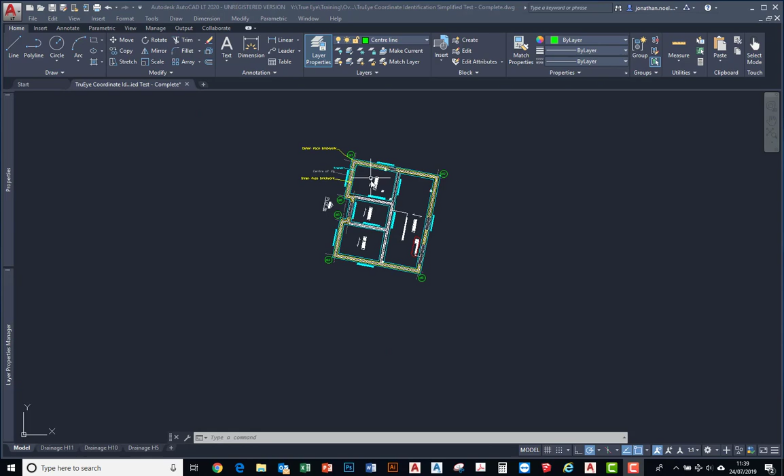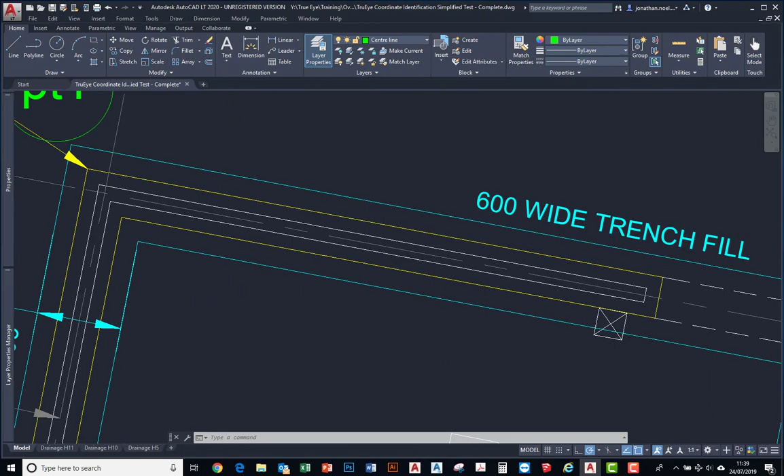The first thing we need to do is show you quickly how to move around AutoCAD. I'm hoping you have a mouse with a scroll wheel, because that makes things much easier. With the scroll wheel, you can zoom in and out by scrolling, and if you position your cursor over where you want to see and scroll, it will take you to that place. So I'm zooming in on point 6, zoom in on point 3, and then zoom out again. The other thing you can do is hold the scroll wheel down to pan around the drawing, which is useful so you can see where you're going at a decent scale. You can zoom out, zoom in again, and pan around. That's the easiest way to get around AutoCAD.

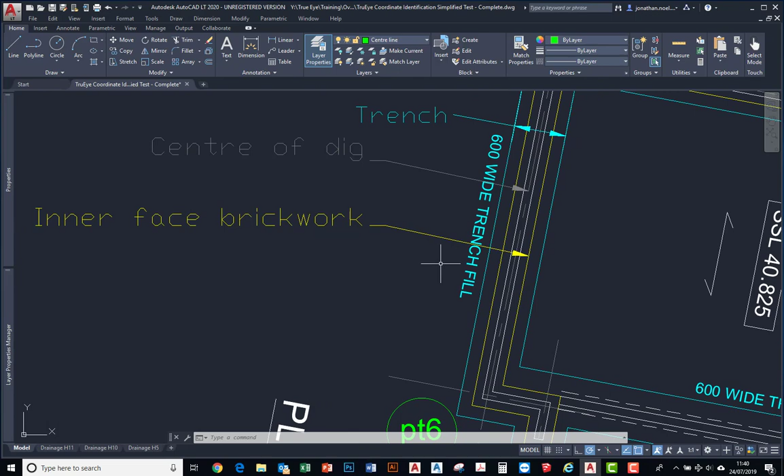Without further ado, what we're going to do in this session is create a centerline. I've already got the layer up here, hovering over at the moment, and that's a layer with a green line type. We have a trench here, which is the yellow box, that extends all around the drawing. The blue box is the actual full trench, and the yellow box is the inner and outer face brickwork you can see. Within that we have a centerline, which I've got in grey here, and that is actually the centerline of our dig.

Some drawings don't have this centerline, so you literally only have perhaps the blue line or the yellow line. So what we need to do is actually create the centerline, which is going to be the midpoint between the blue lines and also the yellow lines.

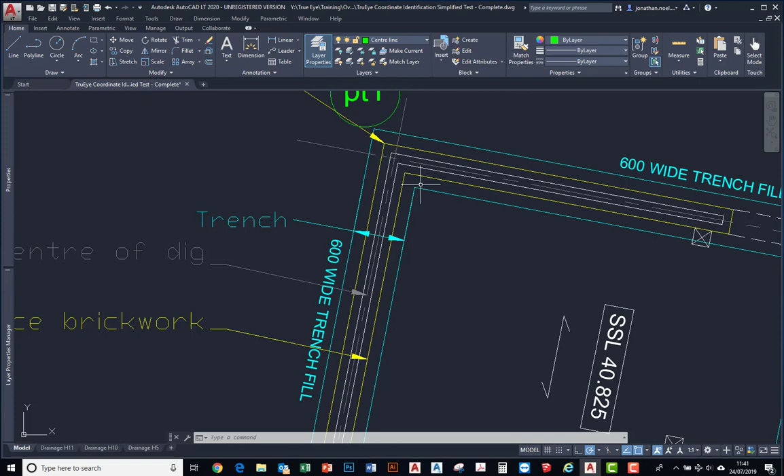What's useful about this drawing is that it shows us the actual trench is 600 millimeters wide, so 0.6 of a meter. We can create a line from the corner of here to the perpendicular of this line, or we can copy a line. Say I could copy this grey line from the end point of the line and move it across to the end point of, or the corner of this, and then trim the line out.

There's a whole load of other ways of doing it. You can offset - type O for offset and offset this blue line by 300. So there's a whole load of ways and methods.

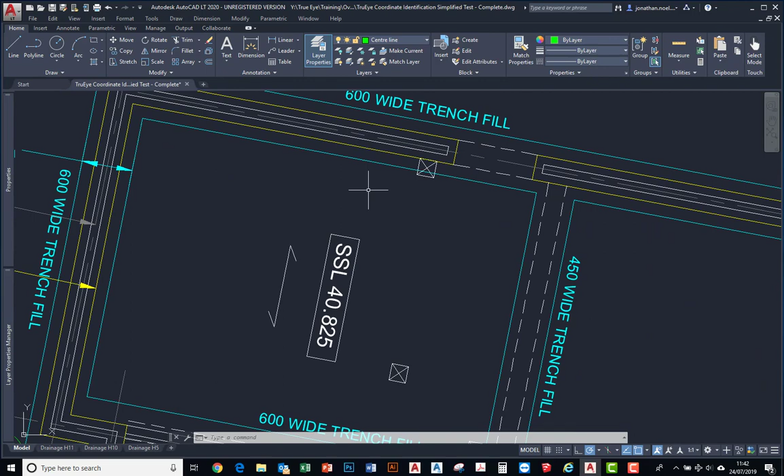We could also, with this drawing, create a line from the intersection of these two grey lines here and take it all the way around. But for the purposes of this video, I'll quickly show you how to draw a line and take it across from the corner here to the perpendicular of that line, which will give us a centerline that we can then do another perpendicular line here and across down here, and so on.

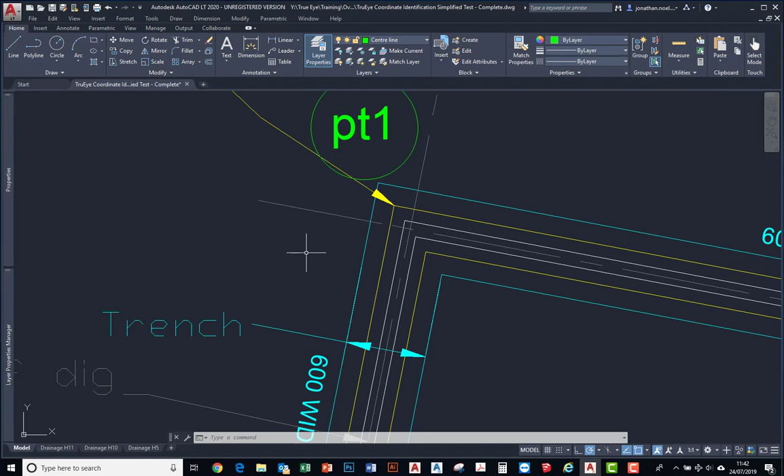The first thing we need to do is type L, which will create a line, and we're going to go from the end point of this line. There's a whole load of snaps going on - at the moment it's showing me the endpoint now, but before that it was showing me the node, and you can tell what it's showing you by moving around and waiting for a second. So I'm on the endpoint at the moment, which is the easiest way of finding it.

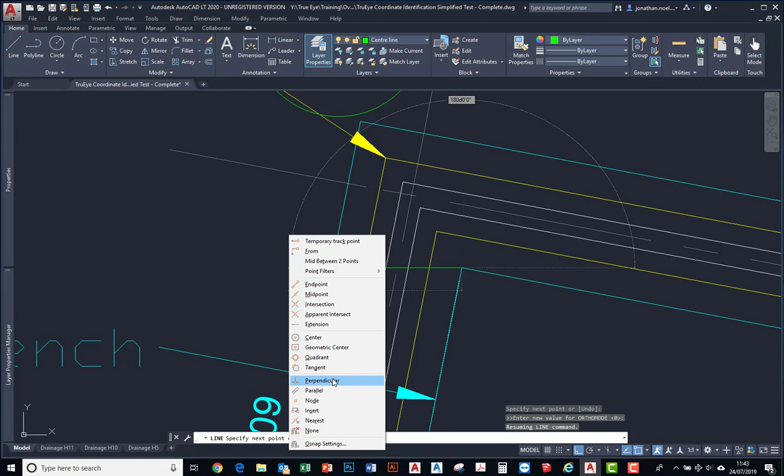Now at the moment I don't have a perpendicular snap set for this line, so the easiest way of getting that is to hold the shift key down on the keyboard and right click, and you'll find you have a perpendicular option. I'm going to click on that, then left click on the perpendicular icon, and that will create our first line.

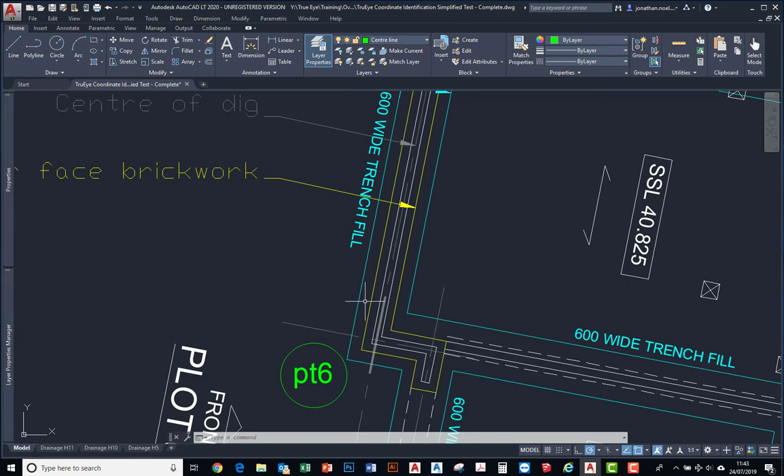What I'm going to need to do is create the line from the midpoint of this line down to the next line, which I'm going to create here to the midpoint of that line. So let's do it again: type L for line, from that endpoint, shift right click, perpendicular of this blue line here. Then I'm going to create a line again, using the midpoint of this line.

Okay, it doesn't look like I've got midpoint on here, so shift and right click again, select midpoint. Oh, that's interesting - our actual grid line is not perfectly central to our 600mm line.

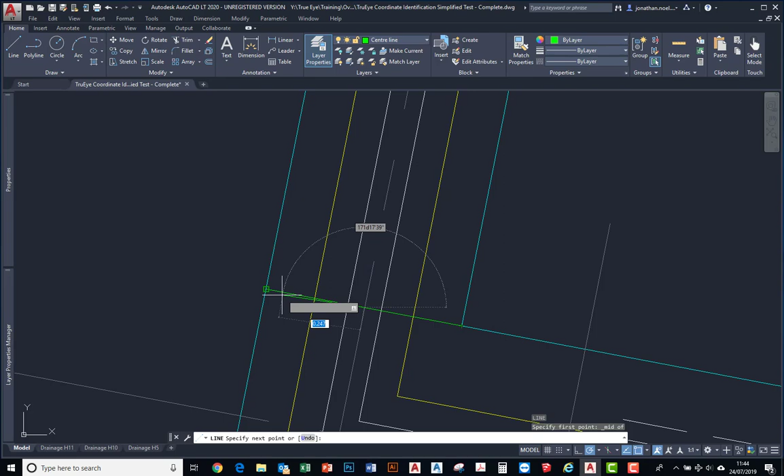So what I'll do in a minute is measure that and see whether that 600mm is actually correct or not. I've got a measure tool here, so I'll click on measure and go from the endpoint of that, shift and right click again, to the endpoint of that. Okay, that's not particularly helpful - I've got 0.597, so our grid is a little bit out, which is slightly annoying.

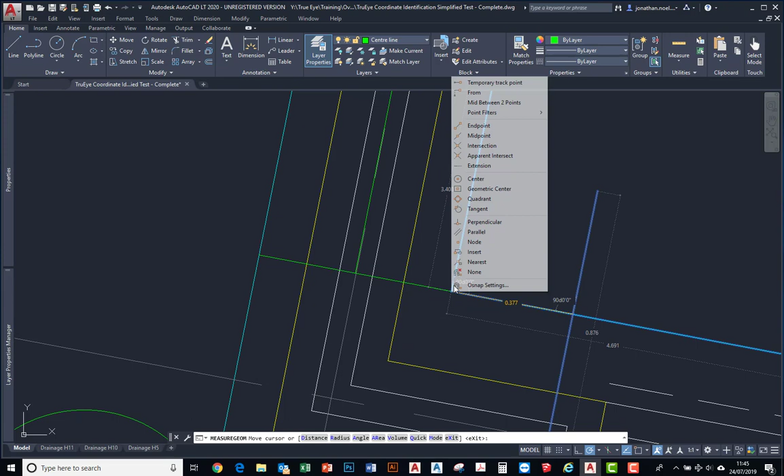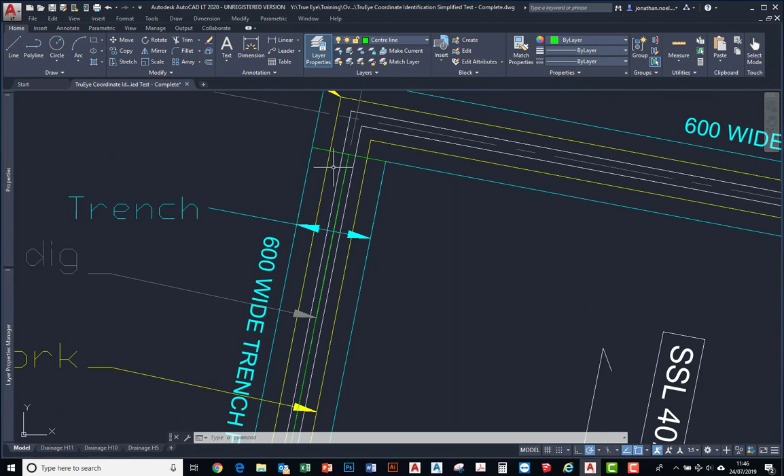So we know that that is our first line. Basically, we're at the mercy of this trench being the correct size, and if it's not, that's not down to you, so don't worry about that. So what I'll do is create another line going upwards and take that perpendicular to that, and do the same here.

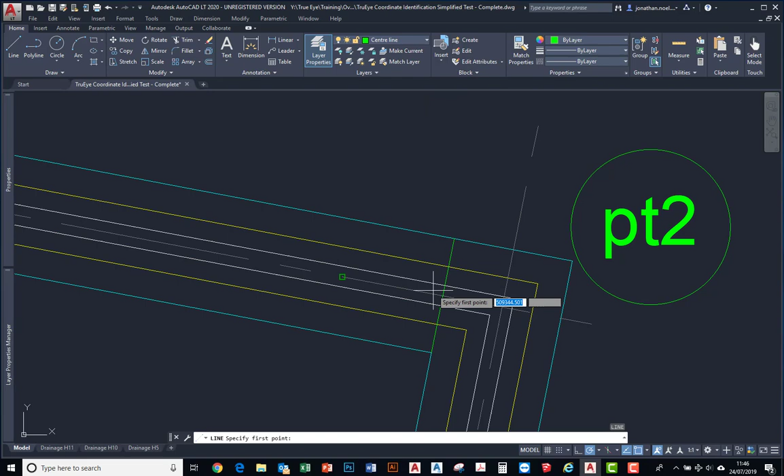And then I shall use a line from the midpoint of that line - shift and right click, midpoint of that line. Okay, so what I can now do is actually fillet these lines there and there together.

So F for fillet, and it says select first object, so that's the first object I want, and that is the second object I want. Now you can see that when you select the second object, down at the command prompt it says fillet current settings mode equals trim, radius equals 0. That's quite important to check - if you're filleting something you need to make sure the radius is always 0, because if it's not 0 you won't get the exact corner that you need. So just double check that.

If it's not 0, type R for radius - I'll just show you quickly there - and type 0, and then you can select the second line. I can see when I zoom in that I've got a nice decent corner there. So that's how you would create your center line for your dig.

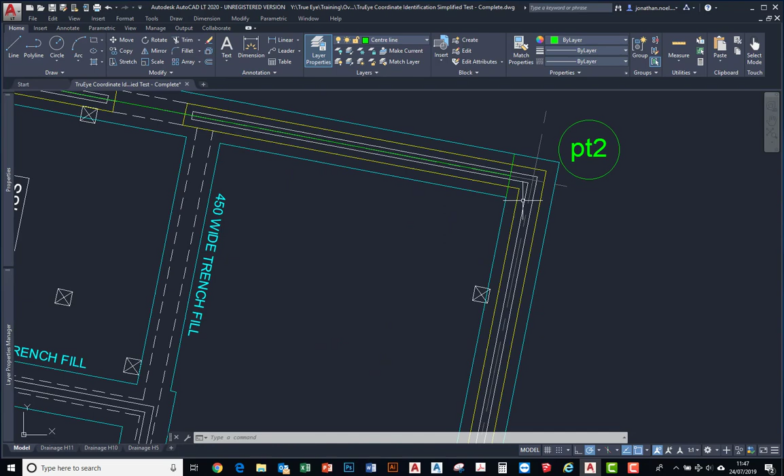And what I'll do is quickly create that center line all the way around here, and I'll join you again when I've done that. Okay, so I've created my center line now.

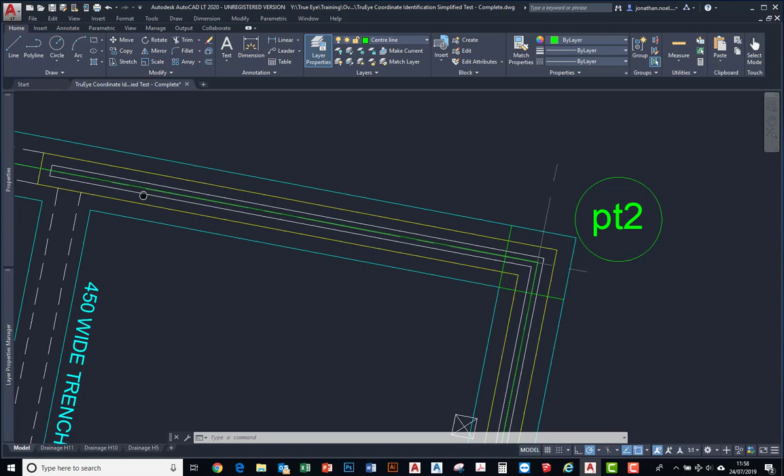So point 1 goes from the corner of that. Point 2, you'll see it's virtually on the line, but it's just slightly out, and I've taken the center line of the line which goes perpendicular to those. Point 3 is the same - we're using these lines as guides really. So I've created endpoint perpendicular there. Same with point 4 - I've filleted them all together.

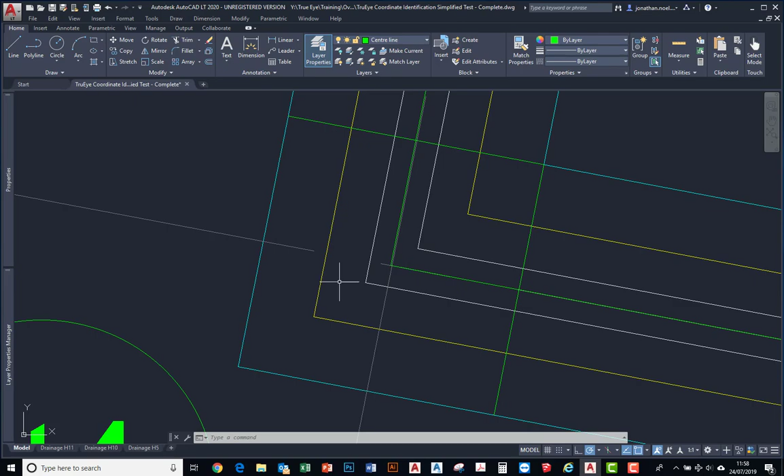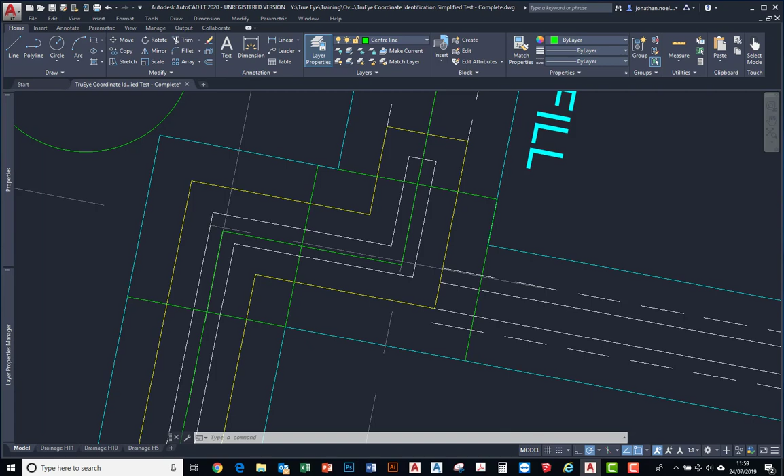Point 5 is slightly odd, as is point 6, in that the actual trench is slightly offset. You might be able to see it here, that the distance from here down compared to there up - the yellow distance is slightly less here, and it's actually worse on this side. It's a lot higher there, or rather the actual white box - you see the white box is sort of in the center of the yellow lines, but the actual yellow is offset differently.

It's a bit odd. So our grid line is probably what they want us to follow, but the midline that I've got here gives us this line. So I would expect you to do the same as me, which is to create a line from this corner here going up there, and then copy that line, which is C on the keyboard. Select the line with the left click, go from the endpoint of that to the endpoint of that, and that creates that line that you then use.

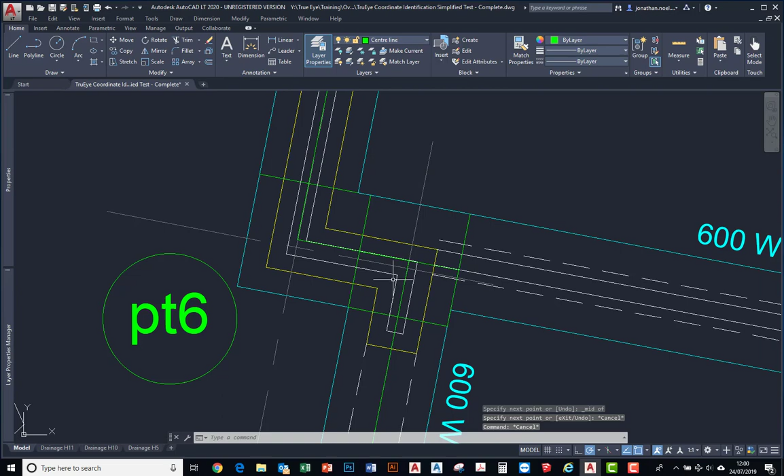You then go from the midpoint of that across, shift right click, to the midpoint of that, and you see that line hits around here. So we've got all of our points now, filleted them together, so we can see exactly where our points need to go. I'll leave these guidelines on, so you don't need to delete them because they're just guidelines - we can delete them later if you want to.

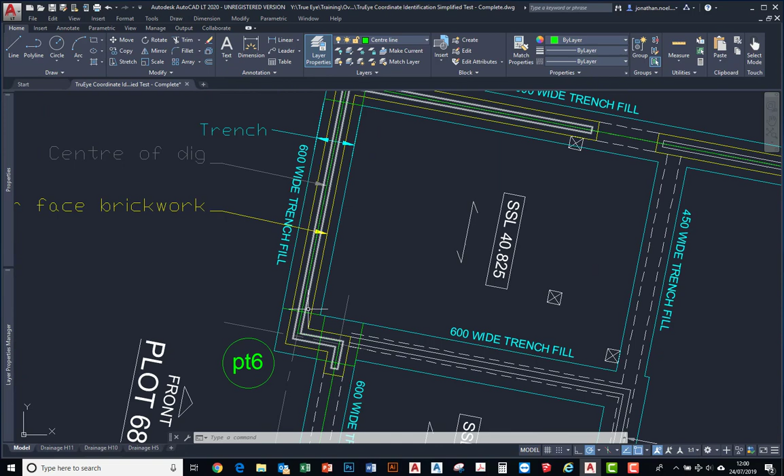So the next stage is to actually create a point on each of our corners, and there's a simple way of doing it - you type in multiple, hit return, and then it asks what command you want to do, and we want a multiple point. So we're creating points now.

So I'm going to say the first point is going to be on our point 1. You can zoom out and in with the mouse, as I said earlier, and we're going to go from the endpoint of that - so that's our first point. Our second point is going to be where we filleted the lines together. Third point will be point 3, which is looking pretty good actually. Point 4 is the next, which is just slightly out.

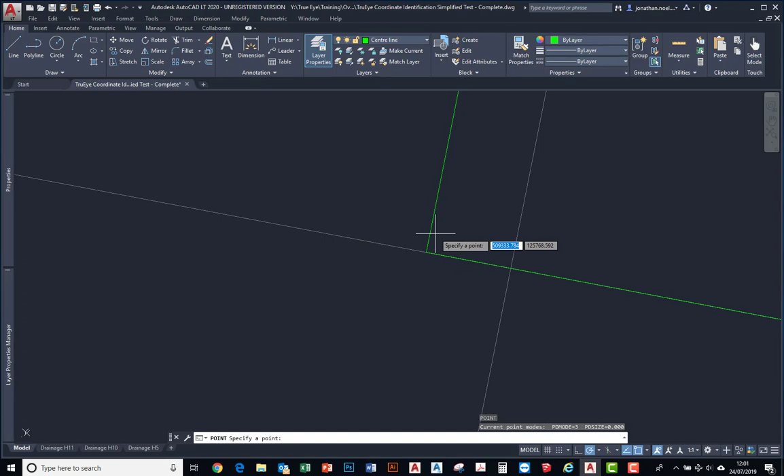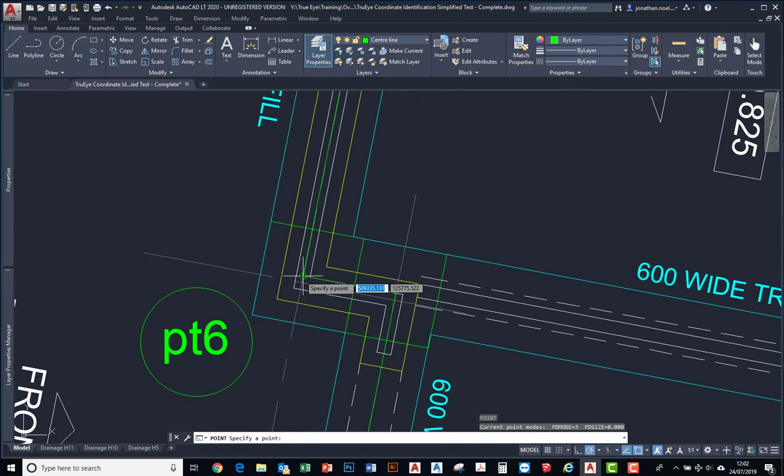If you're in any doubt, just zoom in a little bit further. And what we'll do is we'll regenerate the drawing in a minute, once we've zoomed out a bit, and you'll see that we've got our 5th point, which is that one, and then we've got our 6th point here. Okay, once you're finished, you can just hit escape, and that takes you out of the command.

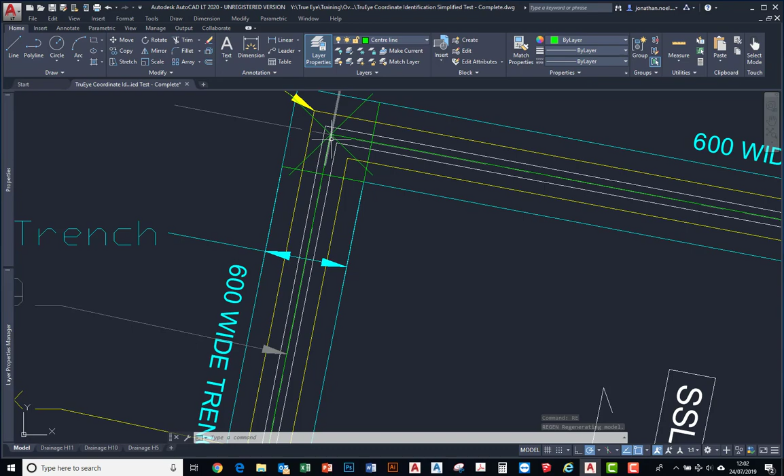So what we'll do is we'll just zoom out, so we've got that in the middle of the page, and pan around, and then type in RE, which regenerates the page, and you can see now that our points are showing up as decent sized crosses, which helps us to be able to see where they are and touch on them when we want to get information from them.

So if I zoom in on point 1 and I type ID, which basically identifies what it is, we can hover over a corner, and we can see that where the cursor is, it shows us a node, and we've got a little circle outside of the center of the point. So once we've typed in ID and hit enter on the keyboard and selected our node, we can left click on the mouse and it tells us the X and Y coordinates.

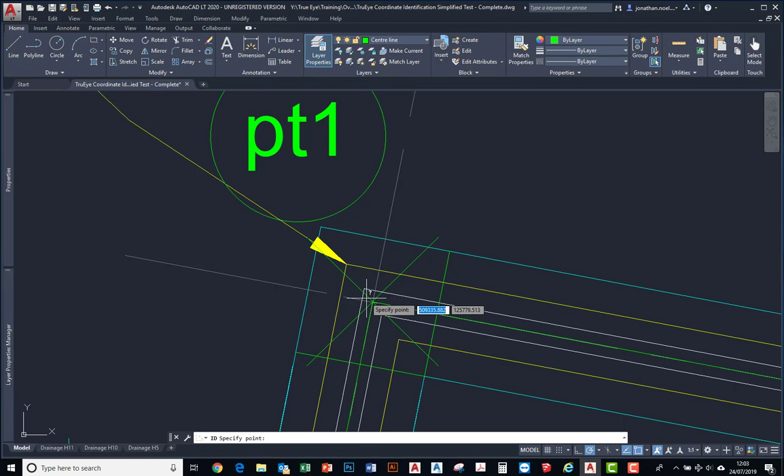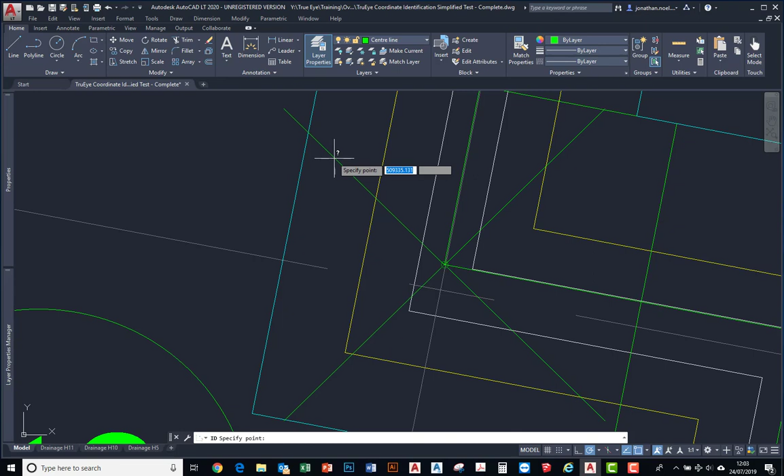But there's another easier way of doing that to export all of those points out, which is using the multiple command again. So we type in multiple, return, type ID, because it's asking us for a command, and we then say, okay, I want that node, zoom out and in again, that node, point, that point, that point, and that point. And what you'll find is that if you hit F2 on the keyboard, you can see all of the previous nodes and points come up on the screen.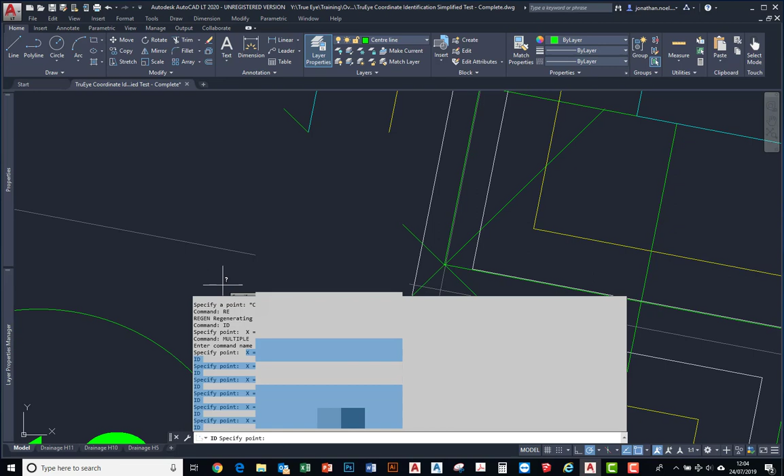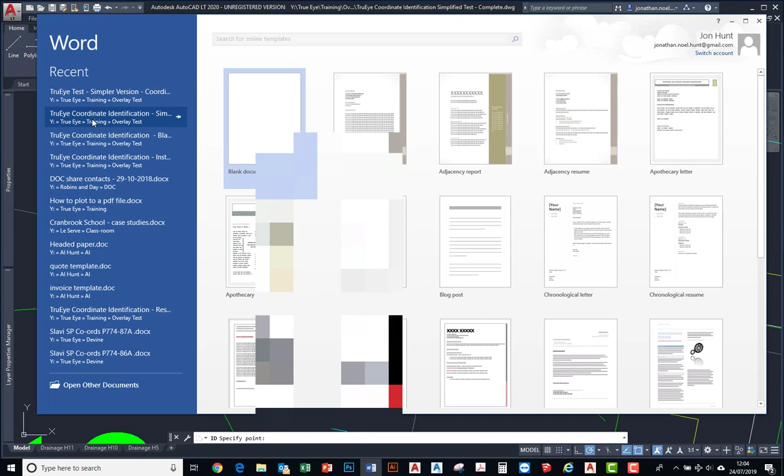So what you can then do is 1, 2, 3, 4, 5, 6. So I've got 6 points here. They're the ones I want. So by hitting F2 you can then select those with your mouse and drag down, copy that, and then you can paste that into your Word document. Well, for now I can just paste it into a blank document because I've got my network off at the moment, so the file's not showing. So basically Control C, Control V, and that is all of the points.

So I'm going to quickly delete that page so that you can't see it, and that is the tutorial done, and thank you very much.

Okay, so what we need to do next is the inner center of dig, which is points 9, 10, 11, 12, 13 and 14, and also the outer face brickwork, which are points 15, 16, etc. And they're also on the Word document. So we've got the center of dig internal for point 9 and the face brickwork clockwise from point 15.

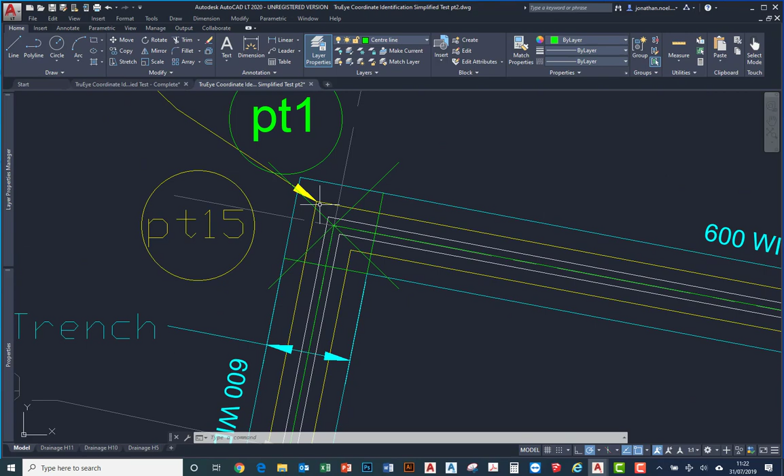So we need to draw our tracing lines, if you like, which go from the midpoint of the actual trench, and then create the points for point 9, 10, etc. And then we don't need to create a line for our outer face brickwork because we've already got that. So we basically just put a point on each corner on the outer face, and your drawing will show all of these points. It's a little bit fiddly because there's lots of points going on now, but hopefully you'll be able to follow what I'm talking about.

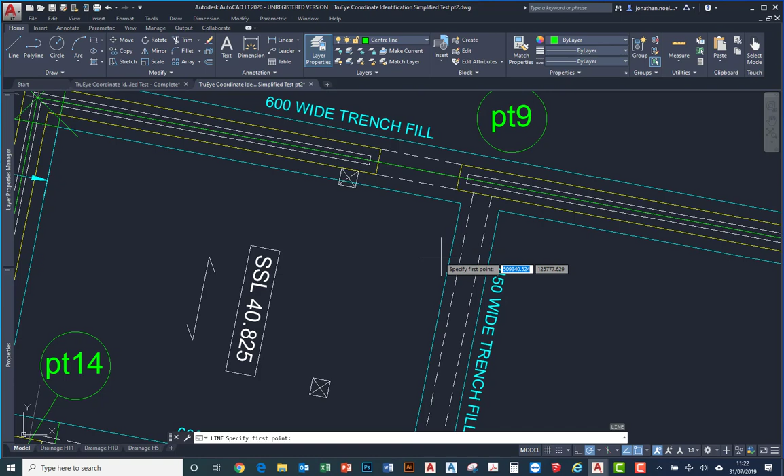Okay, so what we need to do is create a line for this 450 wide trench fill. So we can go from the end point of that to the end point of that, and we'll go all the way down to the bottom of this 450 line, there to there, and then we can draw a line from the midpoint of that to the midpoint of that, and then we can extend that line up. So EX and return, select the line you want to extend to, then select the line that you want to extend.

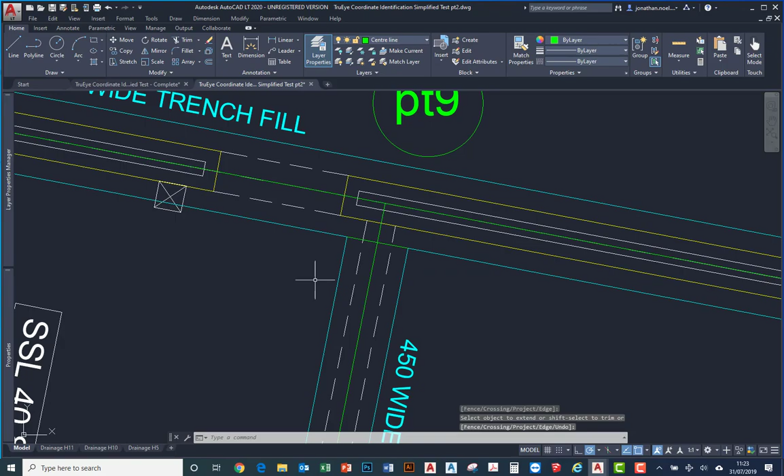And then we have our other line. So we're going to go from the end point of here to the perpendicular, which is shift and right click, and go to the perpendicular of that, and we can edit this line because we've already used it.

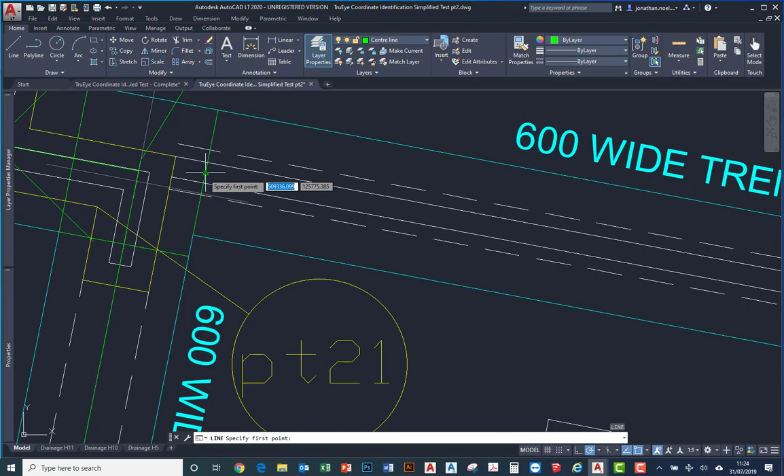So to edit a line, you can select it without any commands showing at the moment, and you get grips, which are these blue squares. So you can just left drag a box around it, or you can just pick the line by left clicking on it, and you pick the blue box and move it up to the end point. We know that that is pretty much spot on, so we've got our line from the midpoint of that to the midpoint of here that we've created already.

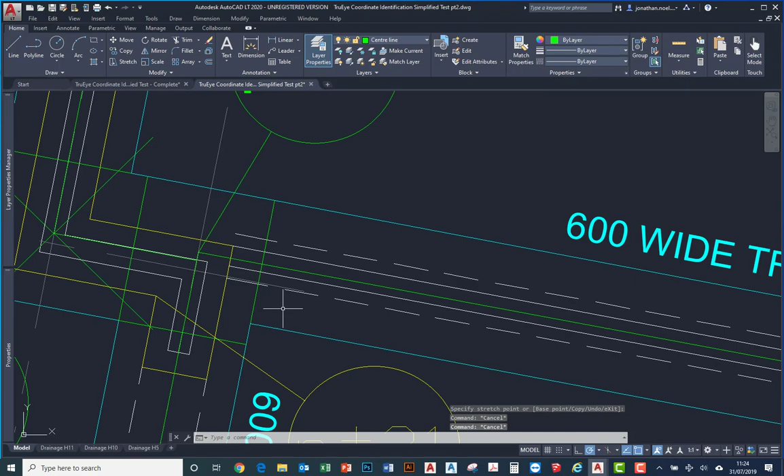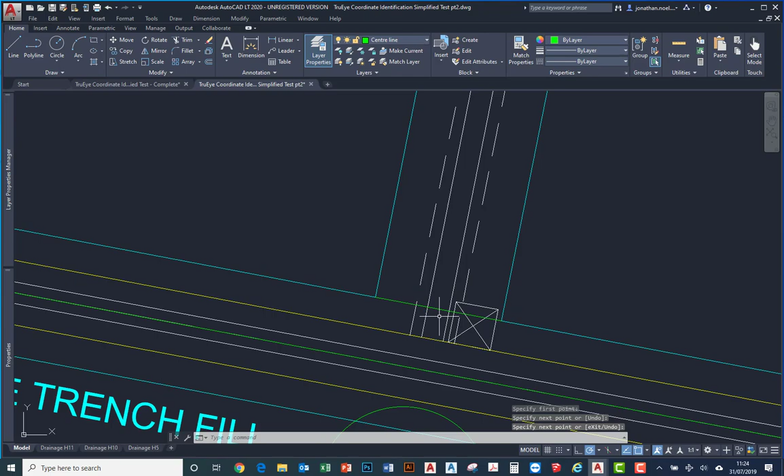Okay, and what we need to do is, we're going to fillet this line, F and fillet return, with that line there. And that's our point there. And then we can create our guide for this point from here to here, 600 wide. We'll go all the way down to this point here, to the end point of that, create another line to there.

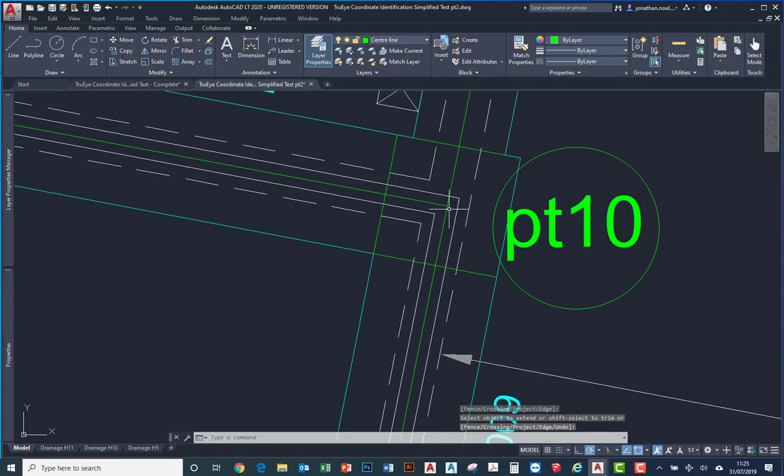You can see that we're slightly offset, so we'll fillet that one with that one, and we'll extend that line down. Oh, we're pretty good. Pretty much spot on, so that's fine. Excellent. And then we've got our last internal part here. So we can do the same again here. This line, select it, look at the blue grips, take it down to that end point. We're going to go from the end point of that to the end point of that, midpoint to midpoint, fillet that with that.

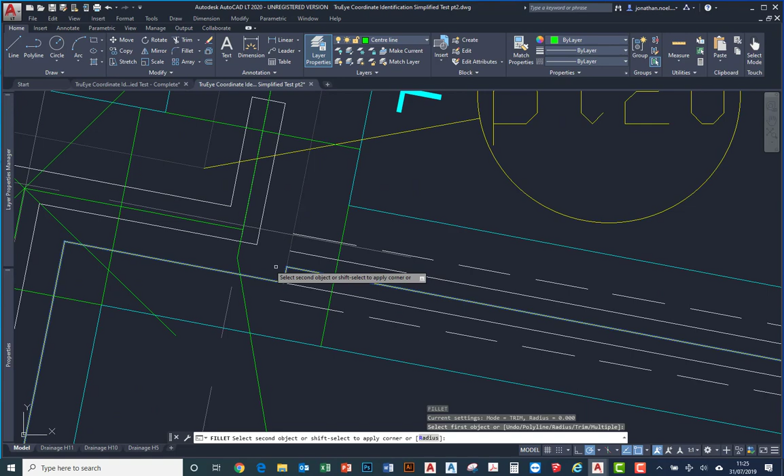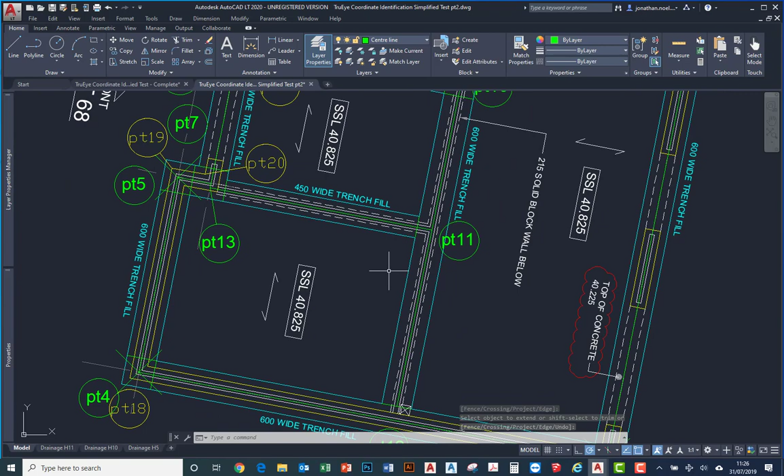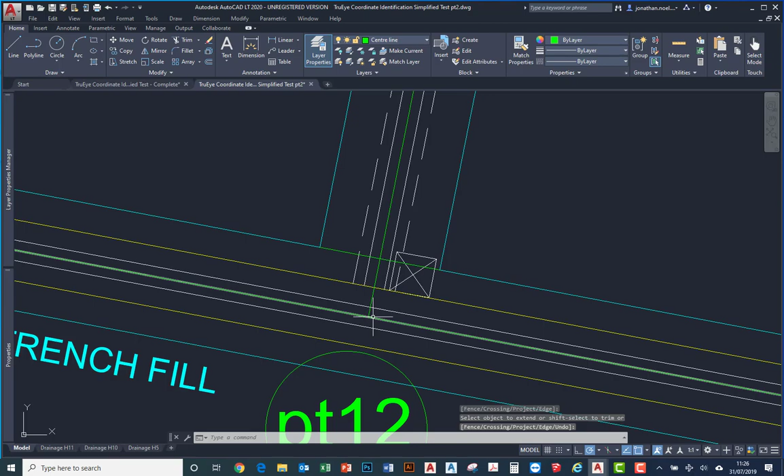That's good, and then we can extend that line. And we can also extend this line. So remember, with the extend, EX return, it tells you select boundary edges down here. So you're selecting what you want to extend to, and then you press return, and then you select the line that you want to extend. And that extends the line up to the line that you're using. Okay, so that's that done.

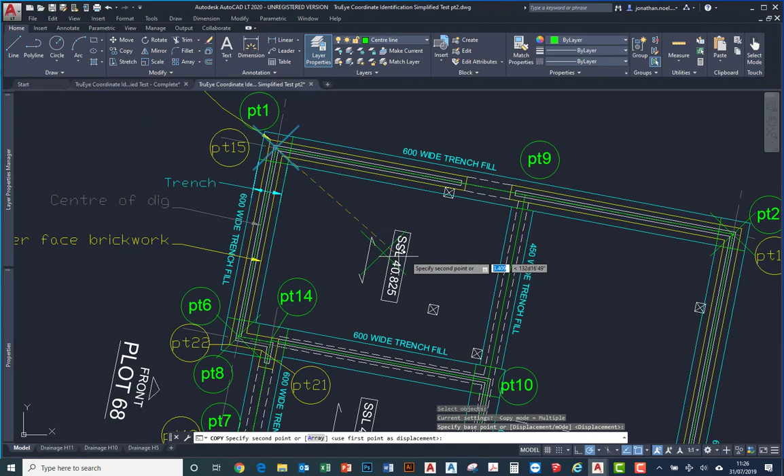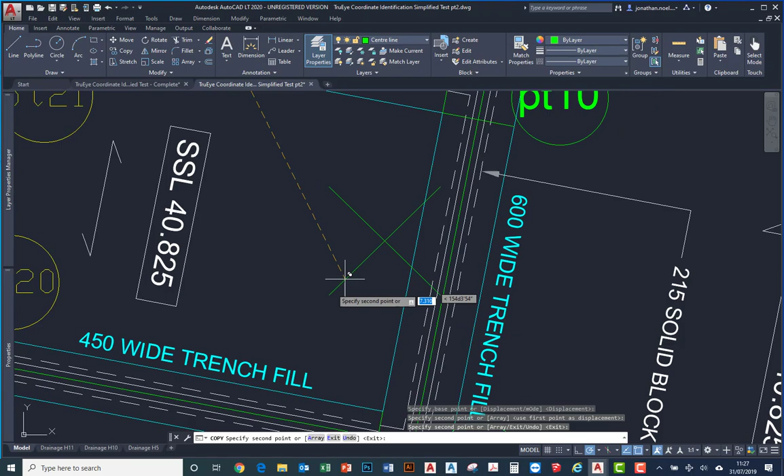So now all we need to do is add our new points in for the internal center lines. I'm going to copy an existing point because it's slightly easier, which is copy, CO. I'm going from the node of this point to the end point of that, end point of that, end point of that. It's actually a sort of intersection there, which is what we're taking. We're going to go to the corner here, which is our point 13, and to the corner here, which is our point 14. Return that, and you can then see that our points are all in.

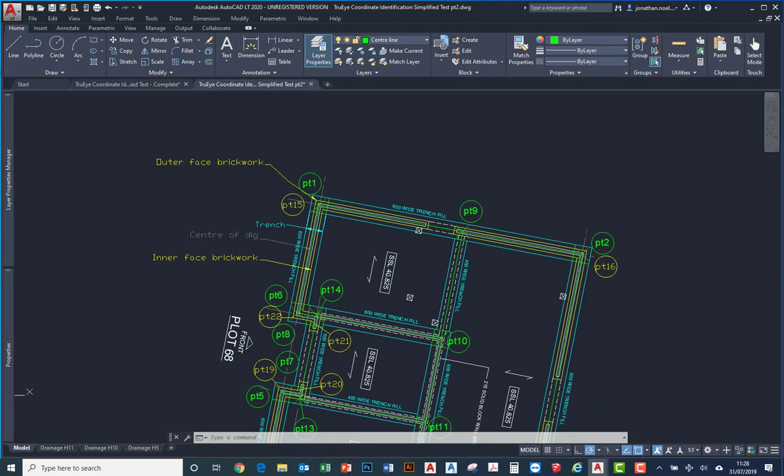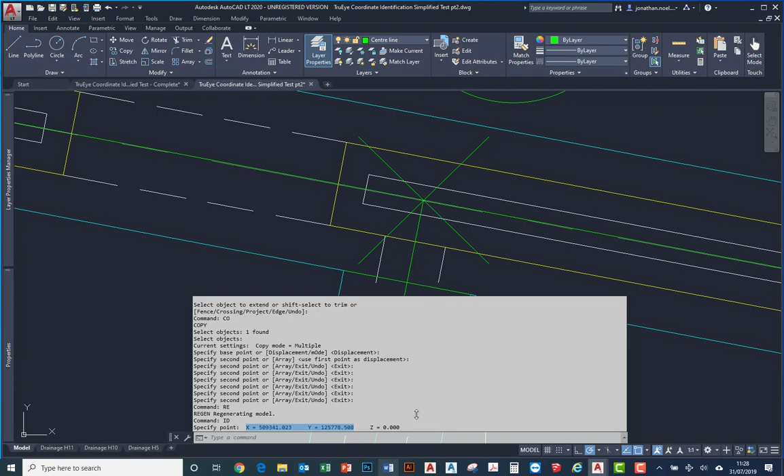Okay, so that's that. Now what you could do at this point is, not export, you could actually extract each ID point and then copy and paste it to point 9. So you could type in ID, select that, and with that information there, hit F2, and we know that that is point 9, so you can Control C once you've dragged the box in, and then you can paste it in there. So I'll give you that one. So you can ID as you go.

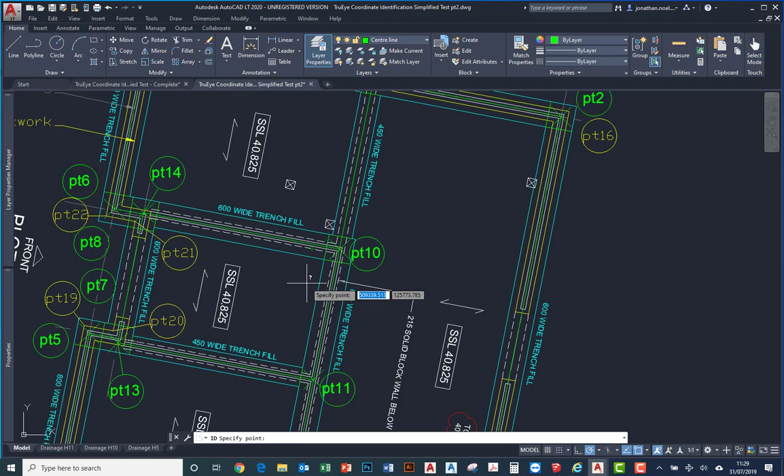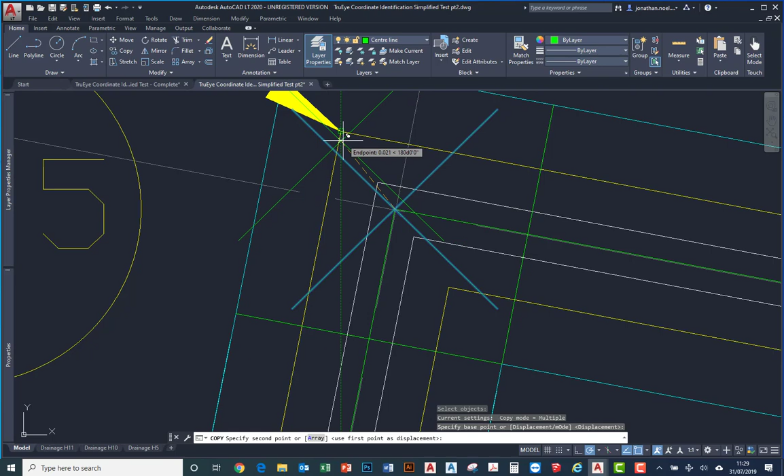So you've done point 9, we can type ID again and select point 10, hit F2 and then copy and paste point 10, and so on, and just do them individually, and then you can copy and paste them in as you like. And what we'll also do is we've got our outer face brickwork. What I would do here is copy, CO return, copy this point that we've created already, from the node of this point to the, that didn't work, so copy to the end point, and we'll delete that. Okay, and regenerate that.

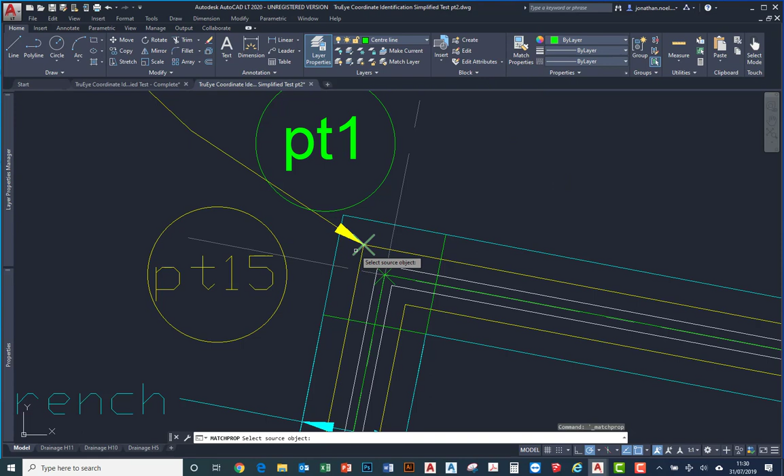And because we know that these are our outer face brickwork, I don't want to get confused as to what these points are. So up here you've got match properties. If you select match properties, we want our outer face brickwork points to be the same layer as point 15. So I'm going to select the circle, and then select the point. And we can see that that is now the same. It's the same color. So then what I'm going to do is copy this

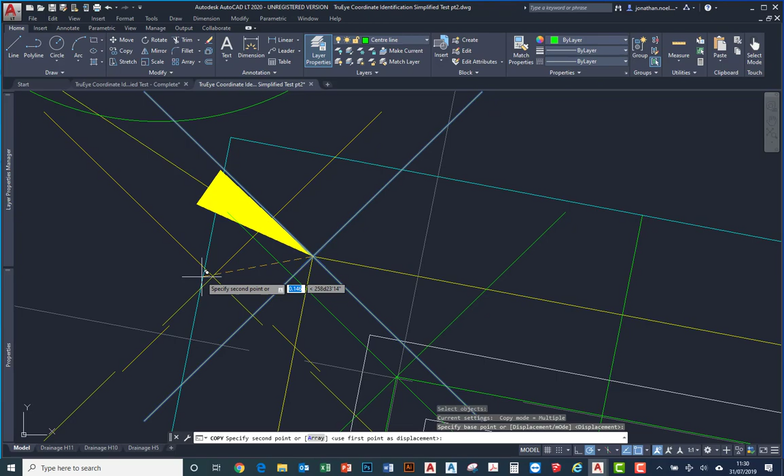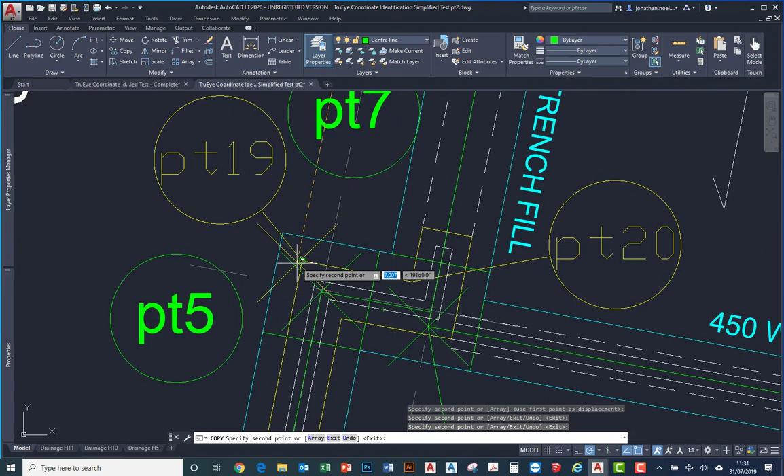from the endpoint of that, and you can see that I've denoted where the points should go. So we're going to go here, that's our point 16, go down to 17, 18, 19. Now I've drawn lines here because it gets a little bit fiddly. So that's 19, that's 20, 21, and lastly point 22. And again you can do the same here. So we've done all our points.

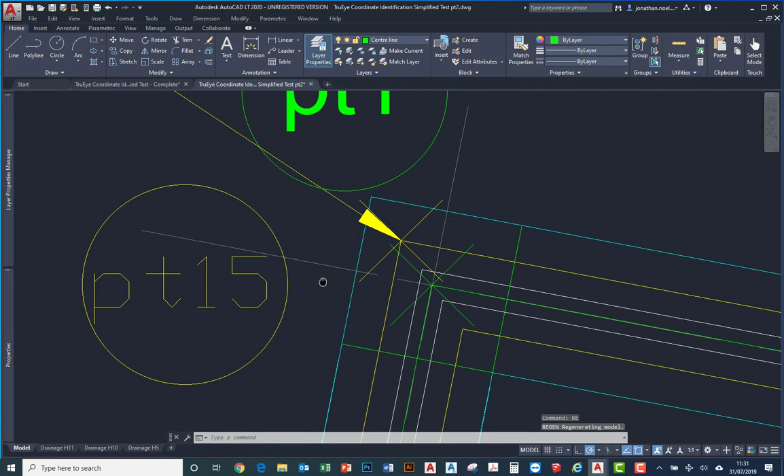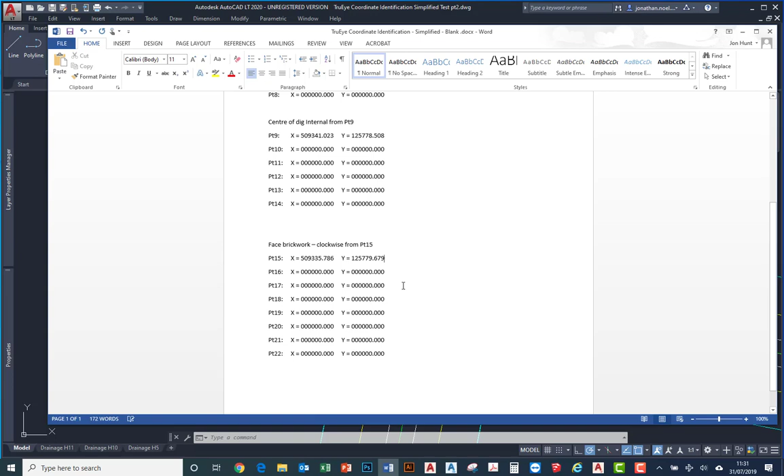Regenerate that, type in ID, we want that one, hit F2, so we know that point 15 is that figure. And we can paste that in. Okay. All done.